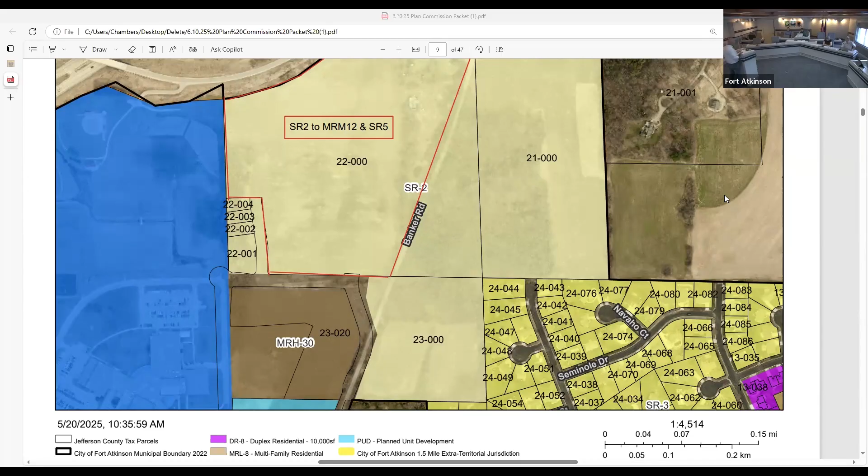But this is relating to the rest of the portion of land to the west of Banker Road, where you can see the square box of the SR2 to MRM12 and SR5. That area here is what we're having the public hearing to. If you could scroll down just a little bit further, back it out so we can see the overall preliminary plat.

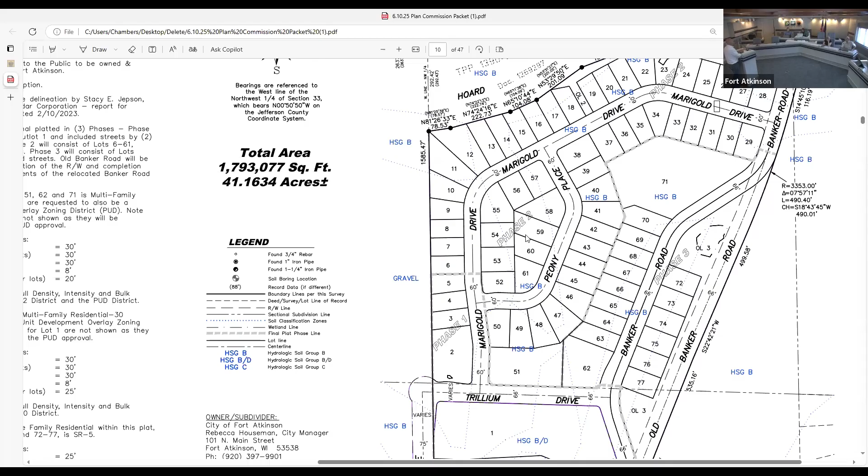There you go. And this would have to do with all the lots to the north of Trillium Drive, minus 2, 3, 4, and 5. So all the rest of those are part of this zoning map amendment, establishing the zoning for each of those individual lots. And those are all listed if we go one page down. Yep, they're actually listed on the preliminary plat, on each of the lots.

So if there was any question as to which lots are proposed for which zoning, I believe the title page also has a list of each of those. That title page has a description of each of the lots for their proposed zoning or future zoning. So this is mimicking that zoning designation that is listed on the preliminary plat. But looking at the comprehensive plan, this is in concert with that. This is listed as neighborhood, which is a variety of different housing types and development.

So with that, I guess I would welcome any questions. Well, I think we'll wait on questions from the Plan Commission until we get to that point on the agenda. But I will go ahead, and if you want to take a seat, I'll open the public hearing and see if anybody has any comments. And then we'll move on to the next one.

So I will open the public hearing relating to the zoning map amendment to change the zoning of these parcels on the preliminary plat from SR2 to multifamily residential, SR5, single family residential, and conservancy. Anybody from the public wishing to speak on this? Second call, anybody from the public wishing to speak? Third and final call. Okay, I will close the public hearing on this item.

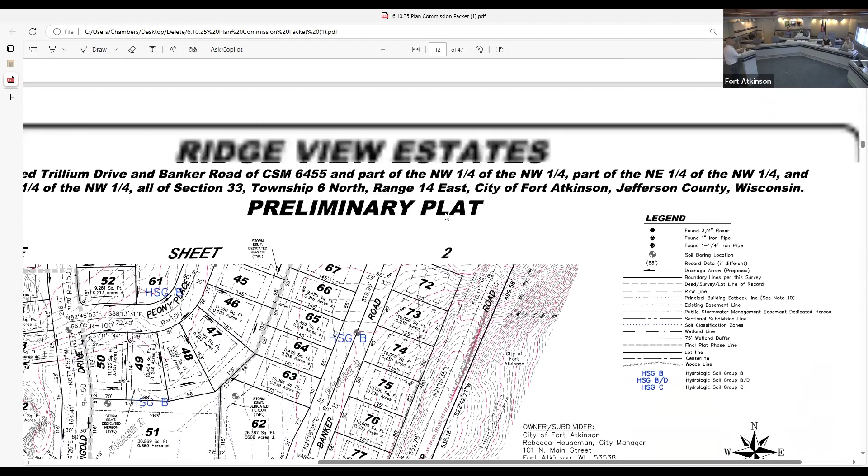Jed, I will ask you to come back up and present the staff report relating to a zoning map amendment to change the zoning of the properties located at 1349, 1347, and 1345 Marigold Drive from single-family residential SR2 to single-family residential SR5. Yes, similar to the previous one, but this is regarding the zoning for a previously approved CSM for the lots that CSM had, lots 2, 3, 4, and 5.

We can see these on the preliminary plat if you would. I believe it would be one more page back up, actually. I know that mouse is a little difficult to.

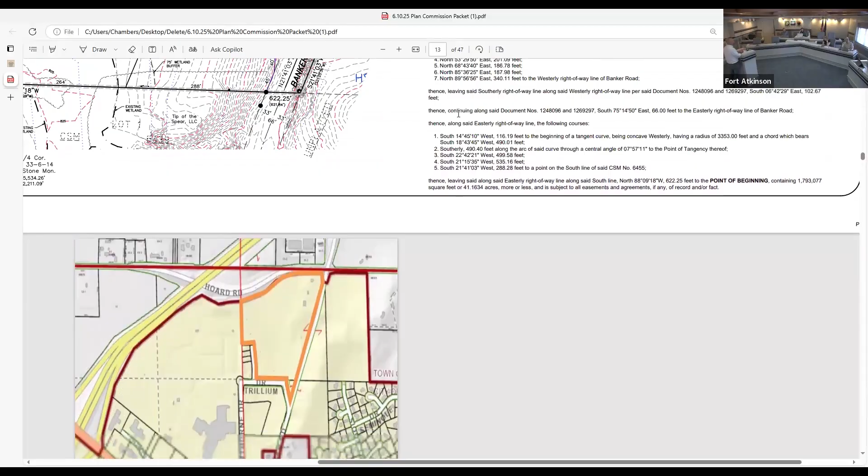Lots 2, 3, 4, and 5. Lot 2 was approved for zoning with MRM12 with a PUD overlay - that's the two 4-unit townhomes that were recently approved.

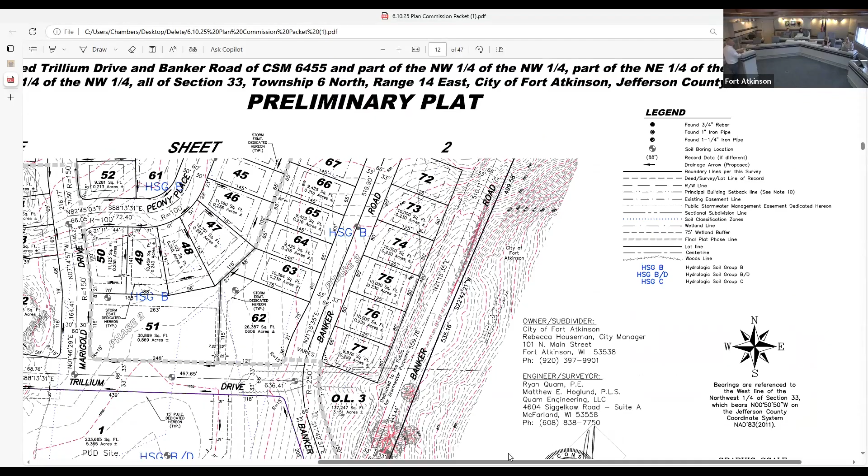This is a zoning map amendment for lots 3, 4, and 5, which are proposed single family. This one's fine, just go that way. Yeah, just a little bit to the west. There you go - 3, 4, and 5, far left part of the screen.

Those are proposed single family SR5. This would continue with the previous zoning map amendment, continuing single family from the multifamily, getting less and less dense going to single family. Once again, this is in concert with the comprehensive plan.

I should note that both proposals, the zoning map amendments, were noticed to the public according to statute and ordinance. We'll wait on questions until that section of the Plan Commission agenda.

We'll go ahead and open the public hearing for this zoning map amendment for the parcels located at 1349, 1347, and 1345 Marigold Drive.

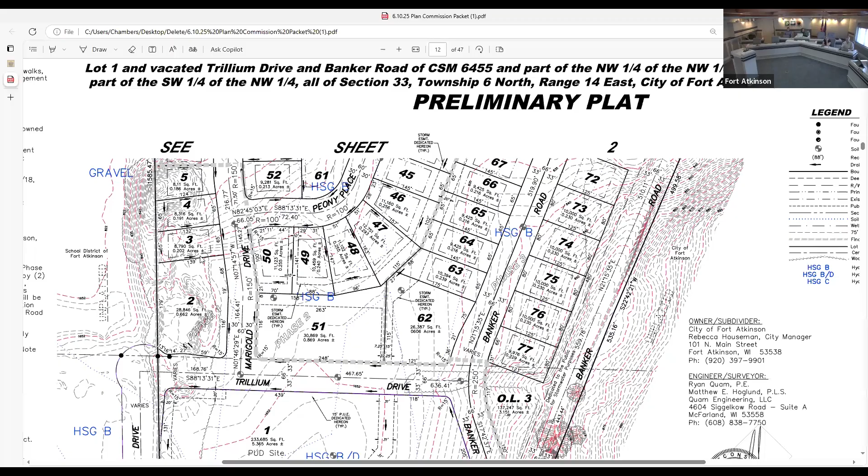First call for anyone wishing to speak. Second call for anyone wishing to speak. Third and final call for anyone wishing to speak on the public hearing. Hearing none, I will close the public hearing.

Next item on the agenda is new business. We have review and possible action relating to the minutes of the May 13th, 2025 Plan Commission meeting.

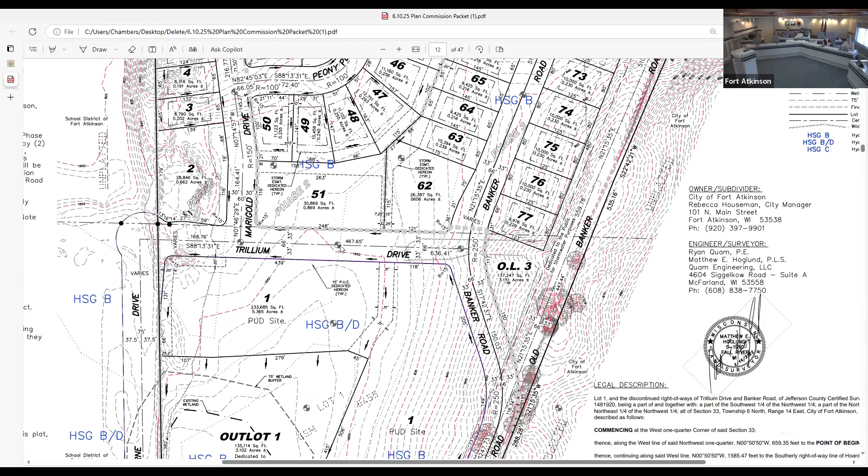Any questions or comments on the minutes? I have two items. The first is a request to add a little bit of detail.

John, can you turn on your microphone on the back? Thank you. Newbie thing here. Right, so do I have to hold? Hit it again, so it's green.

The first is, during that meeting I had asked regarding the sign application for Devout Real Estate whether a projecting sign had been considered. Mr. Drager said that the zoning code currently prohibits projecting signs in the historic Main Street district. I just wanted that noted.

And then I have a follow-up item. I didn't know where in the agenda it was appropriate to do follow-ups that weren't corrections or revisions to the minutes themselves. I had a brief Q&A with Mr. Drager regarding permeable pavement for potential walkways within Ridgeview Estates.

Since then, I found a company that's bringing to market a highly porous structural concrete. The company's name is Aquipor, A-Q-U-I-P-O-R, and they're heading for technology readiness not only on sidewalk type applications, but things as big as runways. It's highly permeable - it can drain 10 inches of water per hour.

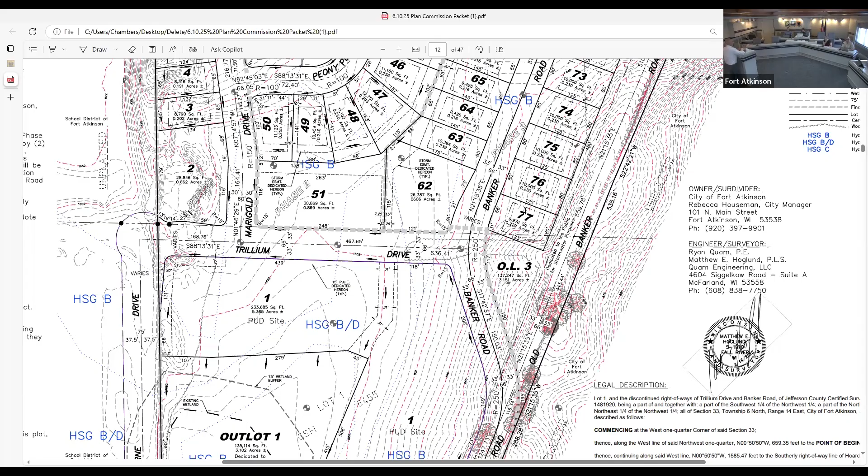Can you talk a little bit about the requested change from SR2 to SR5 and what that does, because they're both single family designations? SR2 would be our least dense single family designation that we have. Switching to SR5 allows for smaller lot sizes and increases the quantity available for the area.

Smaller lot sizes in a large area means more lots are available. SR2 zoning has a requirement for a larger lot, which generally means fewer houses, and we're looking for an increase in housing, so SR5 seemed the most appropriate. SR7 is another option, but it gets quite small and is better suited for infill lots than new development. Excellent, thank you.

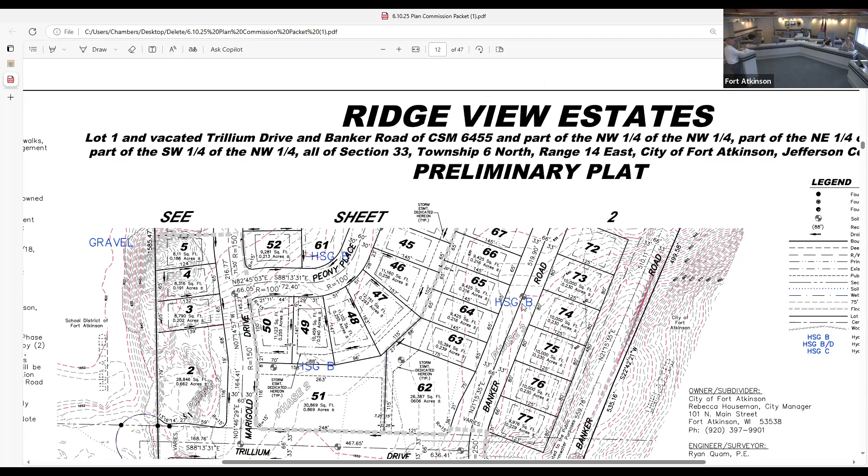And the lots proposed to be zoned Conservancy, can you tell us what those are? Yes, those are stormwater management areas. They have one along the Banker Road rerouting, and then up at the north portion of the subdivision, handling stormwater for this particular area of Ridgeview Estates. Conservancy is a non-development zoning, and it's appropriate here - it lists stormwater management as a use.

I will also note in the staff report you noted consistency with the comprehensive plan. I'll also note that these zoning changes are consistent with the neighborhood plan that was approved by the Plan Commission and City Council back in 2022, when we had the folks at Vandewalle assist us with master planning this area to determine what the city wanted to see.

Any other questions from the Plan Commission on this matter?

I do, more just for information. So like SR5, generally I had assumed that meant like 5 houses per acre. So as that number gets larger, the houses per acre, is it actually that close ratio - like SR5 means a 0.2 acre sized lot? Yes, it's actually very close to that, and that goes through all of our zoning designations - you get your number of units per acre in general.

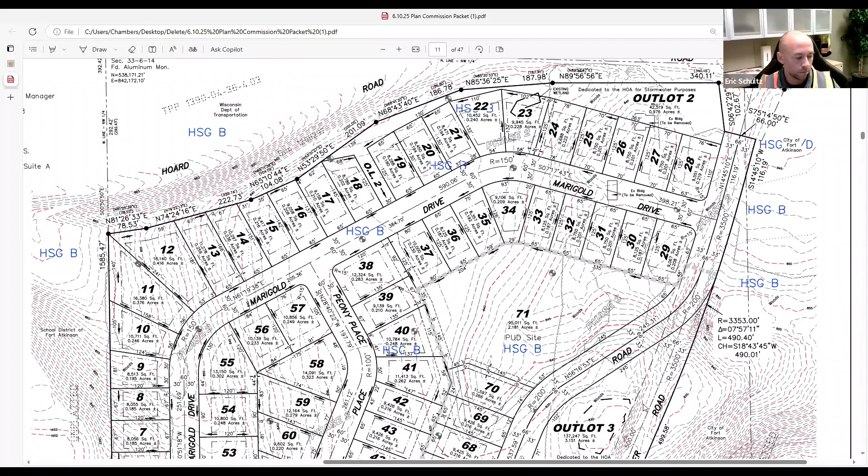Any other questions? Hearing none, I would entertain a motion to recommend this matter to the city council for approval. So moved. Second. We have a motion and a second. Any final discussion amongst the Plan Commission on this matter? Hearing none, I will call the question. All those in favor, please signify by saying aye. Aye. Any opposed? That motion carries.

Next item on the agenda is review and possible recommendation to the city council relating to a zoning map amendment to change the zoning district for the properties located at 1349, 1347, and 1345 Marigold Drive from single-family residential SR2 to single-family residential SR5.

I'll welcome any questions here. Similar situation - the only difference is this was approved through a CSM and is established already, but this would be establishing those three lots, 3, 4, and 5, as single family SR5, with many of the same reasons as the previous comments. Staff and Plan Commission recommend City Council approve this one as well.

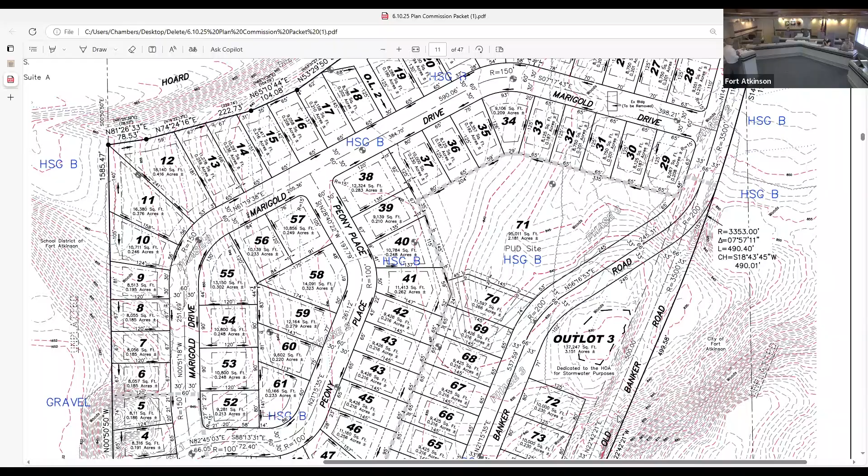Any questions for Mr. Drager from the Plan Commission? Okay, I would move that we recommend to the city council the zoning map amendment to change the zoning district for the properties located at 1349, 1347, and 1345 Marigold Drive from single-family residential SR2 to single-family residential SR5. Second. We have a motion and a second.

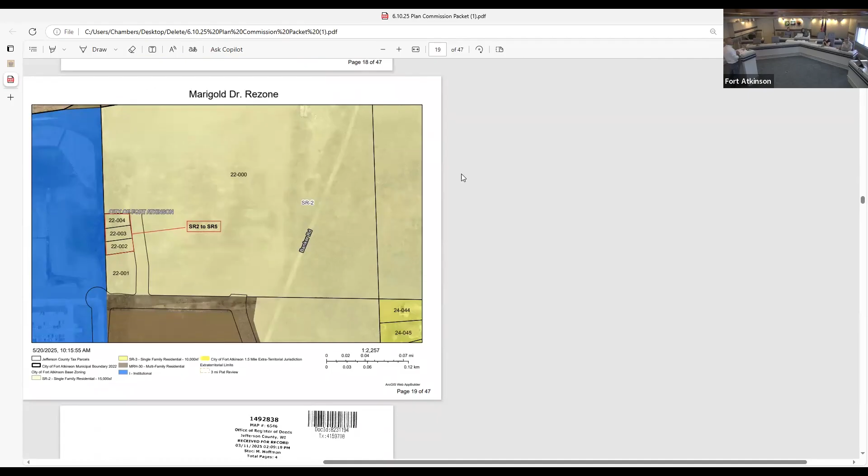Any discussion amongst the Plan Commission on this one? I will again note the consistency with the neighborhood plan and consistency with the comp plan. I will also note that Intrepid Investments, with which the city has a development agreement to develop the Ridgeview Estates subdivision, is really interested in getting building permits, which they can do after the zoning map amendments are approved and we close.

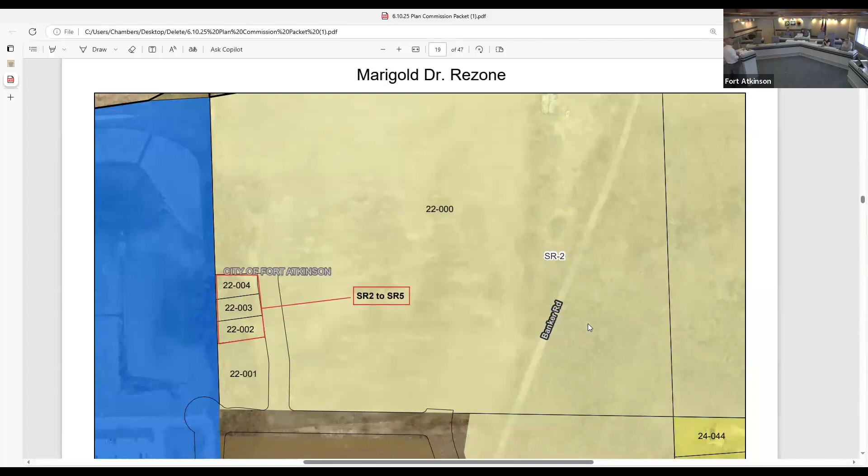So we have a motion and second on the floor. All those in favor, please signify by saying aye. Aye. Any opposed? That motion carries.

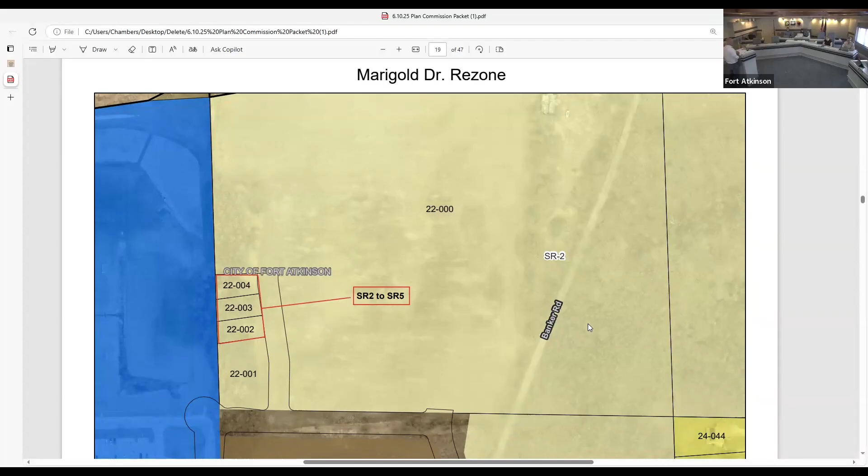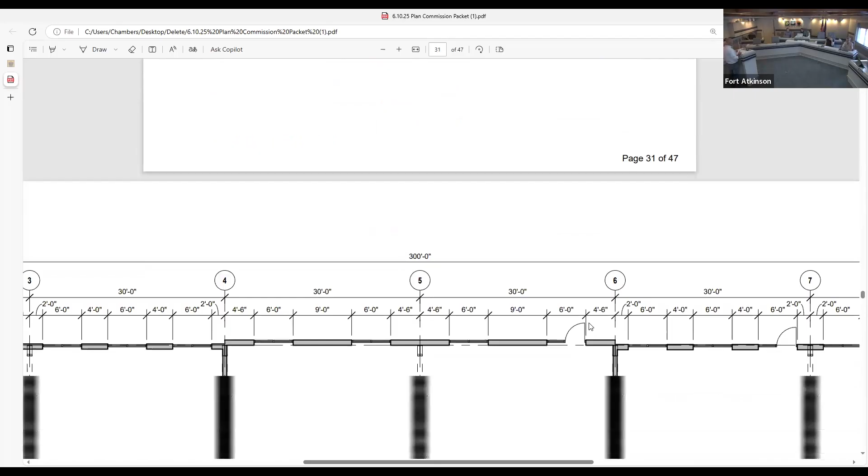Thank you. Next item on the agenda is review and possible action relating to a concept plan for an industrial flex building to be located on lots 12 and 13 in the Klement Business Park. Mr. Drager: okay, so this is an exciting concept here. To note, it is not a full site plan review - this is just a concept view, so it's not meeting every ordinance that we have. It's meant to be an overview of what is to come. So with that, we'll go into Wisconsin Development Partners, which made an offered purchase - we have a representative here.

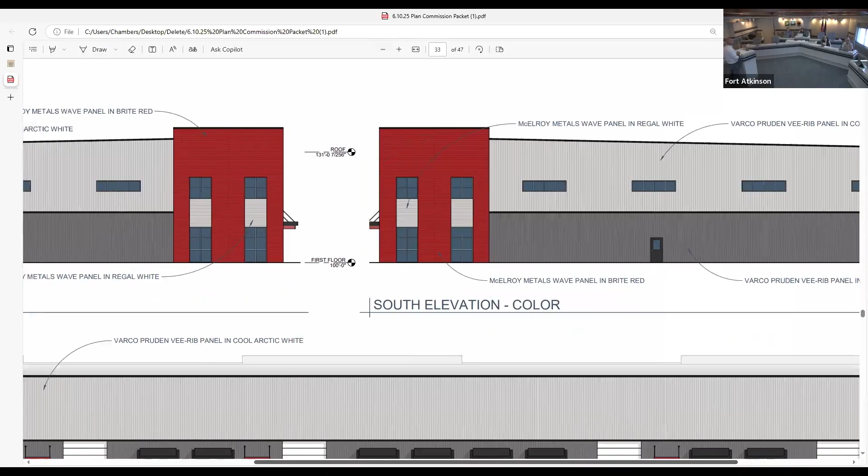Offered the sale of lots 12 and 13, the city asked for a site plan for that sale to go through. This is a concept proposal for what they would like to put on that site. They also have an option for purchase of lot 1 if that's exercised by October 31st.

As you can see here, this is for a flex commercial building, flex industrial I should say. Honestly it could be a mixture of both, given the business park zoning that we have out there. There are a few more possibilities for what could go into this proposed building.

From initial view of this, it is meeting our ordinance in theory with the materials, color changes, facade orientation, or so. Other than the fact that it's not a complete site plan, it is showing the direction that we would be looking for it to go as far as coming up with an approvable site plan.

Once again, it is a concept. There are a few things with the garage doors towards the rear that would have to be worked around since it is facing a street. But there are screening options and different ways to go with that.

There are businesses out there, but this is an exciting thing to potentially add alongside Janesville Avenue. The proposed use that would come along with this site plan would be appropriate for the Klement Business Park.

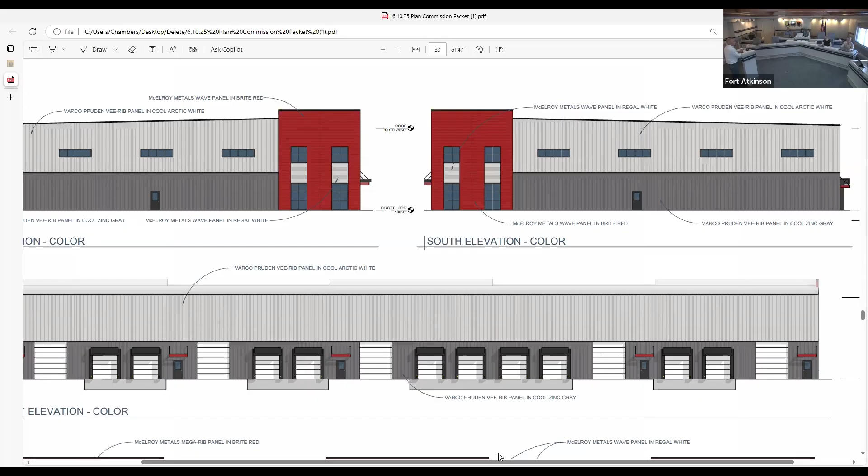Yeah, absolutely. One option for that Janesville Avenue facing direction that you spoke about would be a multi-tenant sign, something along those lines where you could accommodate multiple tenants in that building. We do have sign requirements for that type.

And on the rear of the building, there are sign requirements for on-building signage, of course, but then there's also allowances for taking additional signage from other facades of the building, just as long as those additional signage on that facade don't exceed the limits.

As an option to a multi-tenant sign for the main facade, I wonder if something like I see on certain shopping plazas might be considered, where each tenant does have a sign, but the signs are required to be uniform, and uniform height. The nice thing about that is, as I'm driving by, even if I don't currently have business there, I start to identify the part of the building.

These are big buildings too. They're 300-foot buildings, as I understand, there's two of them. Then when I actually do need to make a visit, I kind of know where to go. It's a small thing, but it's a great thing to point out.

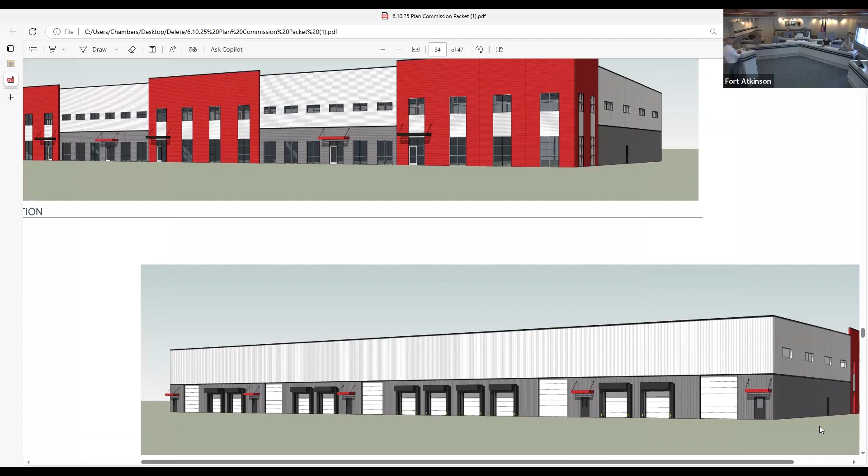I will just note again that full site plans will come back to this body for approval. So all those in favor, please signify by saying aye. Aye. Aye. Aye. Any opposed? Okay, that motion carries. Thank you.

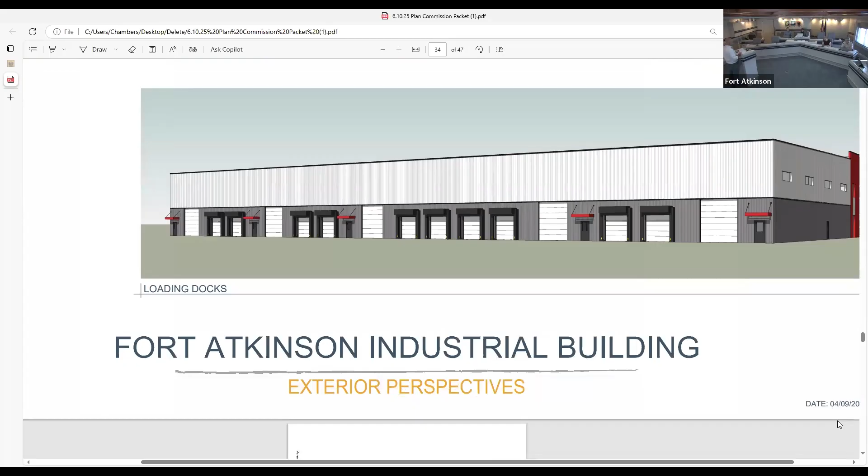All right, next item on the agenda is review and possible action relating to site plan review for signage at Waterfront Dental on Sherman Avenue. This is site plan review 2025-10. Mr. Drager. Oh, thank you. Yep, so this is Sherman Avenue West, former Benner Kind and Stratford BKS Dental.

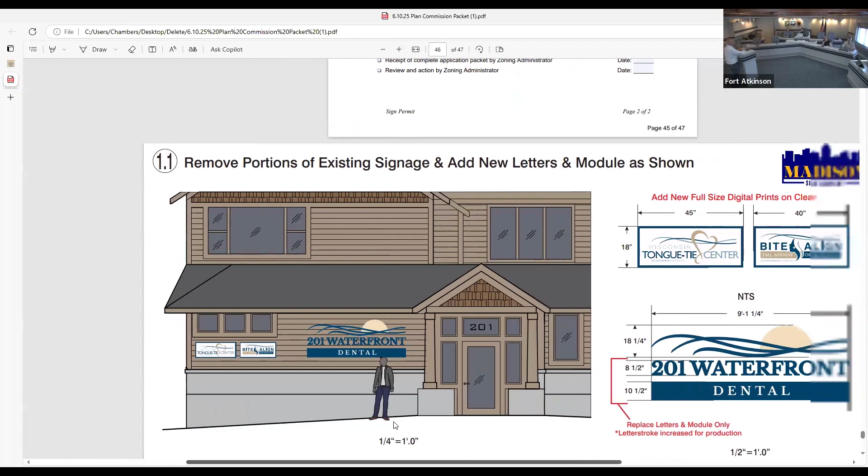They are making a change. It's actually quite minimal. That design with the sun and the waves is existing and will remain. I believe that is not being replaced at all, it's just the wording below. If we scroll one more down, we can see what is there currently. As you can see, they're keeping that wave design and then changing the language to Waterfront Dental.

The two signs on the left there are existing; they are replacing the faces of those. So they are existing, but I did review them. Technically they don't require Plan Commission review as they're just a sign face replacement, but I did review the signs as a whole with the building facade length, and they do meet the requirements for that as a full set. It's not above a walkway, it's not going above any facade.

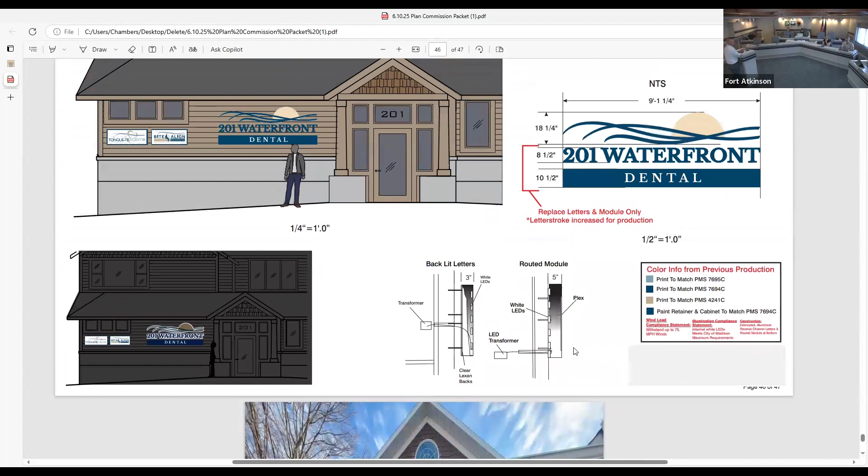It is proposed to be LED backlit, but it is not facing residential, there's commercial across the street. So we don't really pay attention to those, other than, of course, we would review it if we saw that it was too bright or something along those lines. But as far as staff review, it meets the ordinance of the sign regulations for the City of Fort Atkinson, and the city staff recommends approval as proposed.

I welcome any questions. I just had a minor comment: I live on the 200 block of East Sherman Avenue, and the staff report said 201 Sherman Avenue but didn't say West. Sorry, I get mail for the 200 block of West Sherman. I'm always good for criticism. That's all right, it makes me better.

Any other questions for staff on this matter? I would move to approve the site plan for signage at 201 Waterfront Dental on West Sherman Avenue. Second. Okay, we have a motion and a second. Any discussion, final discussion by the Plan Commission on this matter? Hearing none, all those in favor, please signify by saying aye. Aye. Aye. Any opposed? That motion carries.